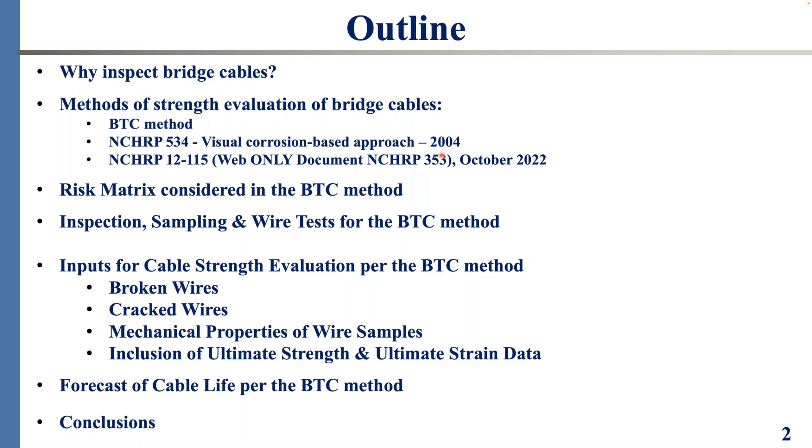And we will finish with the forecast of cable life, a very important feature of the BTC method. The method has been published in two reports of the FHWA. The first is the primer for the inspection and strength evaluation of suspension bridge cables, published in 2012, and a New York State DOT report C0711 published in 2011, co-sponsored by New York State DOT, New York State Bridge Authority, and FHWA.

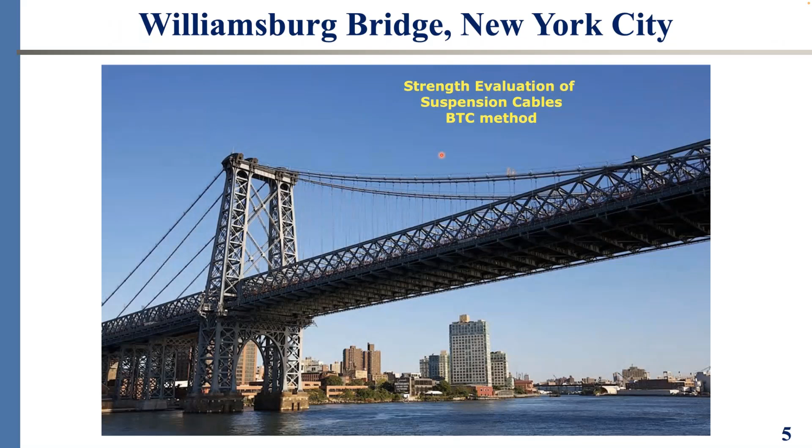The BTC method has been applied on the Williamsburg Bridge cables in New York City, the Pierre Laporte Bridge in Quebec City, Canada, where we applied the method to evaluate the strength and forecast of life of the main suspension cable, as well as the condition assessment of the suspender ropes, the helical ropes, where we forecasted the life of the ropes and worked on the prioritization program for replacement of the entire set of suspender ropes. That's currently ongoing.

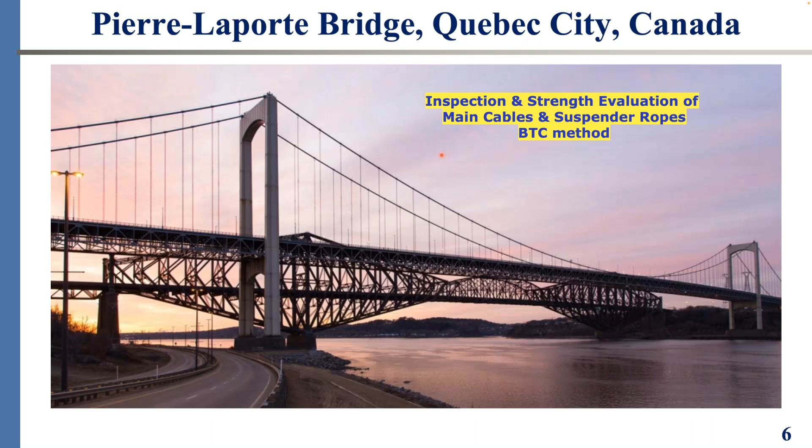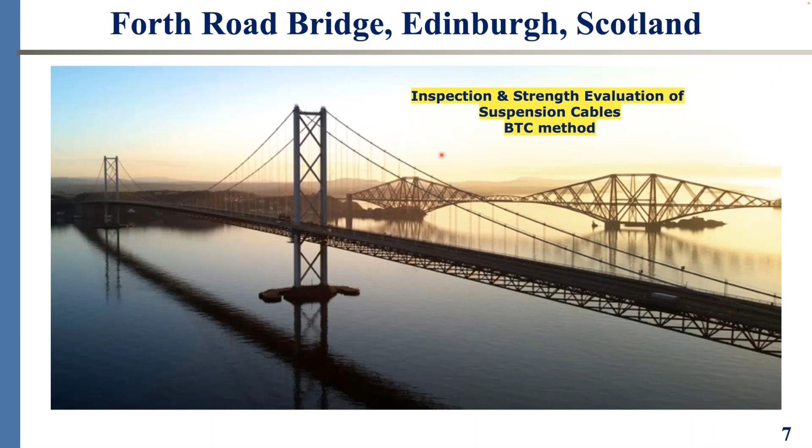The BTC method has been applied on the Forth Road Bridge in Edinburgh, Scotland, and on the Bronx Whitestone Bridge in New York City over the East River, and on the Mid-Hudson Bridge over the Hudson River in Poughkeepsie, about 90 miles north of New York City.

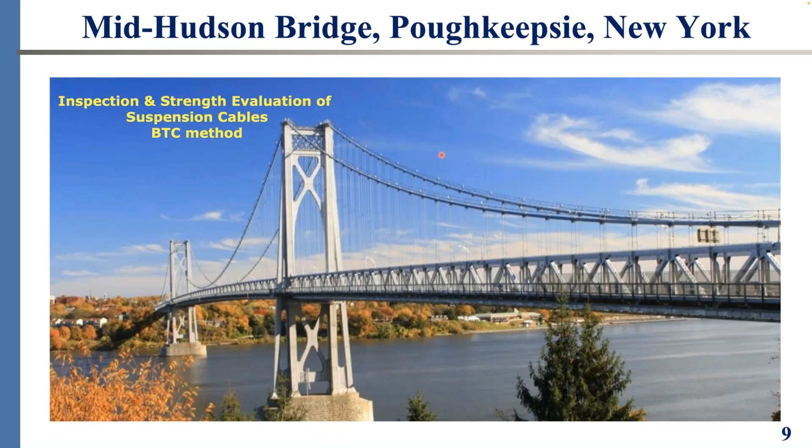Beautiful scenery up there. We have been on the design review and fabrication construction support team for the Yavuz Sultan Selim Bridge, basically the 3rd Bosphorus crossing in Istanbul. It's a suspension cable stay bridge hybrid style of structure. It reminds you of the Brooklyn Bridge, and it is the longest suspension bridge that carries both railway and roadway traffic. The BTC method has contributed to the fabrication specifications, which has a lot to do with the longevity of the design and the life of the cable.

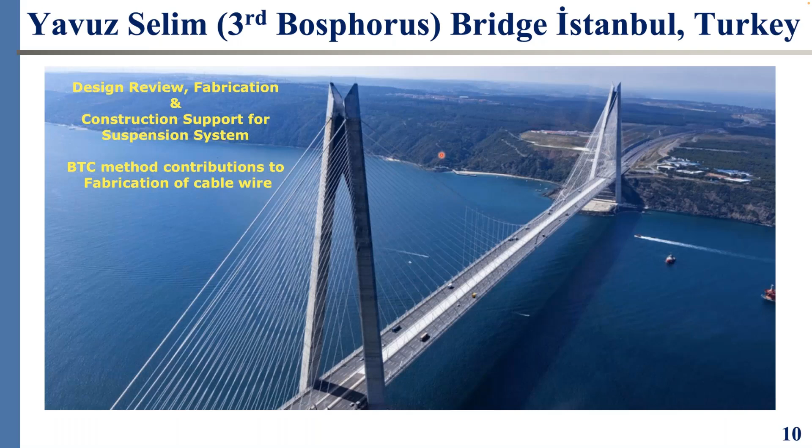We had very much the same role on the 1915 Çanakkale Bridge in Turkey, which also connects Europe and Asia over the Dardanelles Strait. This is now the longest suspension bridge in the world.

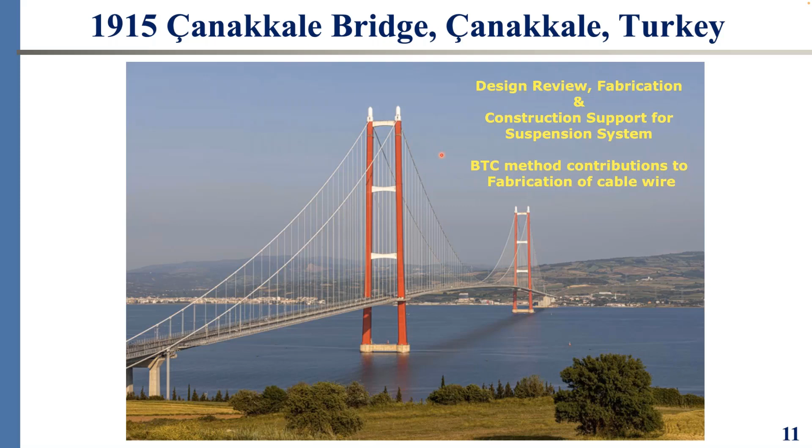Why do we inspect bridge cables? That's a very good question. You look over here, it's an actual replica of a long span cable, and what you have here is upward of 27,000 wires in the cable cross section.

Over time, these wires degrade to different degrees of deterioration in terms of embrittlement, which plainly put is the loss of ductility. They will have cracks, and some wires will break. So a proportion of the cable cross section, in general, will have proportion that's broken, proportion that's cracked, and proportion that's degraded with embrittlement, meaning loss of ductility and loss of strength.

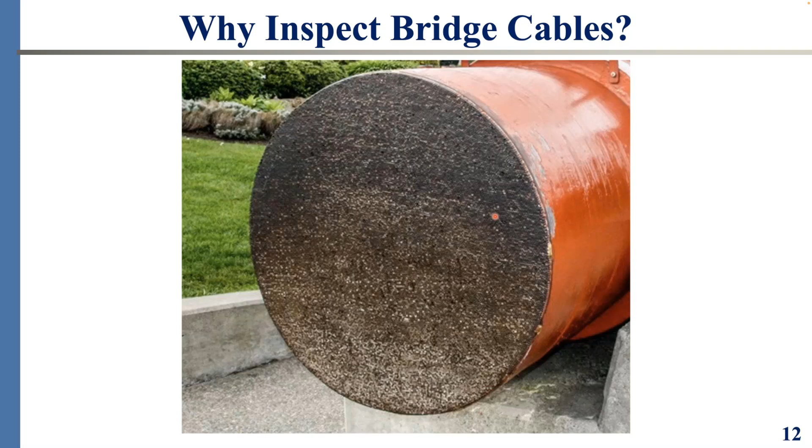By the way, right off the bat, when we mention the word risk, this is just a term we use in reliability analysis and probabilistic analysis - the risk basically of missing deterioration.

So on all the bridges I presented earlier, the existing bridges, aside from the two new suspension bridges I mentioned, they range in age between 53 and 120 years old, and they are in good shape. They are running traffic. The bridges in New York City, I drive on them quite frequently, and the bridges overseas, I drive on them every chance I get, because it's just fun to drive over these bridges.

And the risk that we are trying to quantify here is the risk of degradation, and going forward, what to do about that form of degradation, with the main purpose of prolonging the service life of the cables.

It's very good news that the Williamsburg Bridge is past 120 years old, and a week from tomorrow, speaking of anniversaries, we're going to celebrate the 140th anniversary of the iconic Brooklyn Bridge on May 24th. So there is a lot of good news about that.

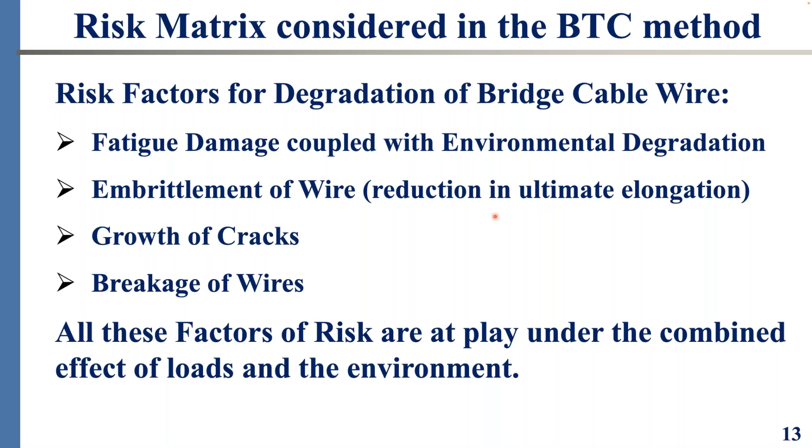So the BTC method process starts with cable wedging and inspection, wire sampling afterwards from each cable opening. By the way, when we say cable opening, that basically defines the length of cable between two successive suspender ropes. So we call it cable opening, panel, or cable length - it all boils down to the distance between two successive suspender ropes.

So we take the wire samples we're going to look at now and take them to the lab, chop them into pieces, have the wire tested as we're going to see later on, and then take the test results and the findings of all the inspections and do the analysis to get the strength of the cable. Then we identify the cable strength today, and do further analysis based on the data to forecast the cable life.

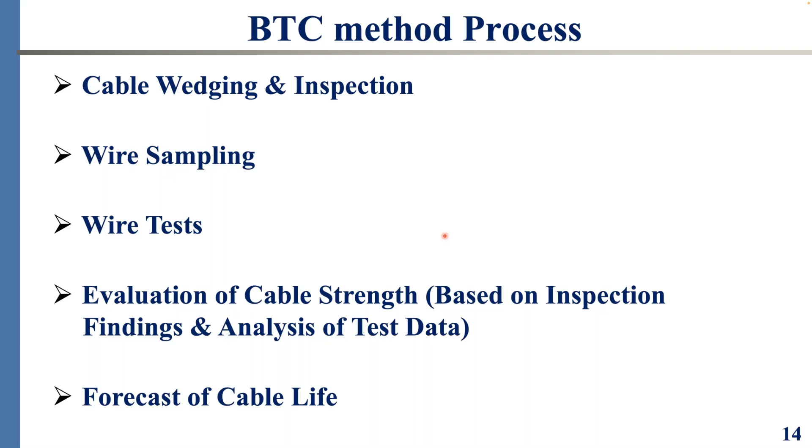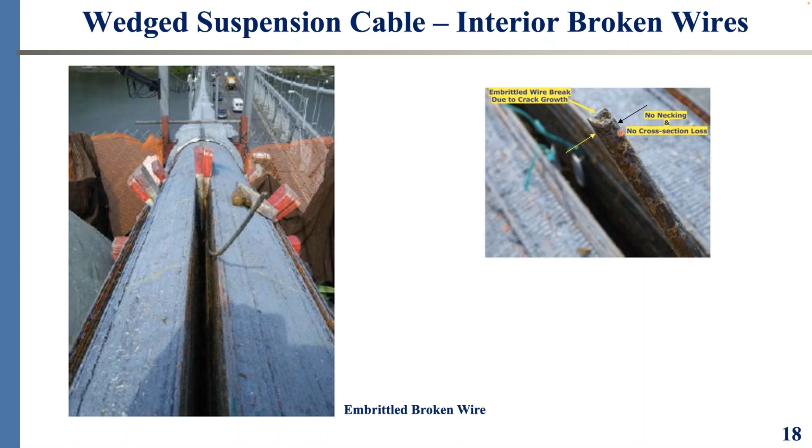It's not a matter of 1 wire or 20, or 15, 16, 18, 20 out of 27,000 or 12,000. It's a matter of leaving a void that hosts moisture and debris and whatnot, and that's not a good thing. So we define a pool of wire samples that we take the samples from, and that depends on the diameter of the cable and how deep we can take a wire out and splice it back in. You'll see what I mean in a couple of slides.

So what we define here is random sampling from each wedge, or whatever random sampling we provide with the BTC method, random sampling process to basically avoid visual bias or the subjectivity of the inspectors.

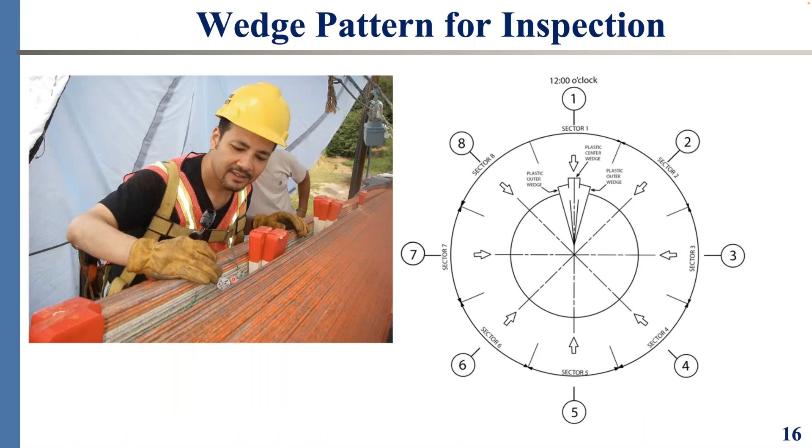Turnbuckle that is used to splice the wire. You'll see a better picture of it—I actually have a sample here on my desk somewhere, I can show it later on. With a couple of pliers on opposite sides, because the turnbuckle is designed that way, you tighten the wire and bring it back to service load, or use a load cell to measure the load in the wire.

So now to the wire test per the BTC method. By the way, all these processes—the BTC method sampling plan has been applied on almost all of them, with the exception of one bridge where we had the test results already. The two methods are done in parallel, so there is no duplication of the sampling, no duplication of the inspection efforts. It is done once and for all, and then the tension test is done.

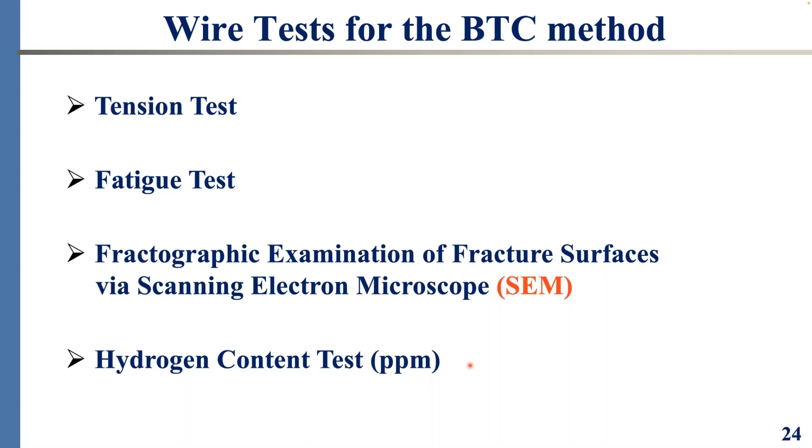And for the ultimate strength, it is typically under 250 KSI. In fact, if you look at the project specifications for all these older bridges up until maybe the mid-70s, you find that the typical minimum accepted ultimate strength was about 220 to 225 KSI, and the strain was accepted even if it was as low as 4%. Up until today, with the wires we're using—the 1960 megapascal wire, which is basically over 280 KSI—we still accept the 4% ultimate elongation. But that's a whole discussion on its own.

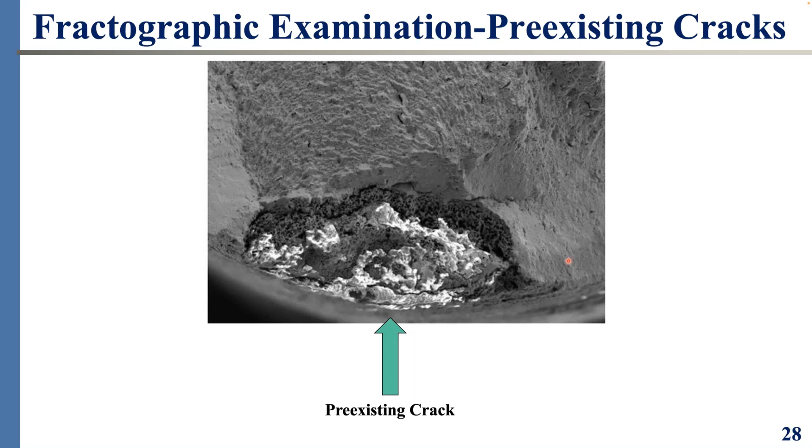So you see here the thumbnail crack. This picture is no mystery - it is the cross section, the circular cross section of the wire. And of course, this is the cracked part. Here is the crescent shape or thumbnail crack, where the wire is maintaining its full cross section, embrittled, with no necking and no sectional loss.

The crack goes into mode 1, which is perpendicular to the stress field, along the longitudinal axis of the wire. Then when it reaches a critical crack depth, it splits along the grain boundaries, and the fracture happens on that upper surface.

So here is another demonstration of these wires. This kind of wealth of information is invaluable in the analysis of cable strength, in forecasting life, and in the assessment of degradation.

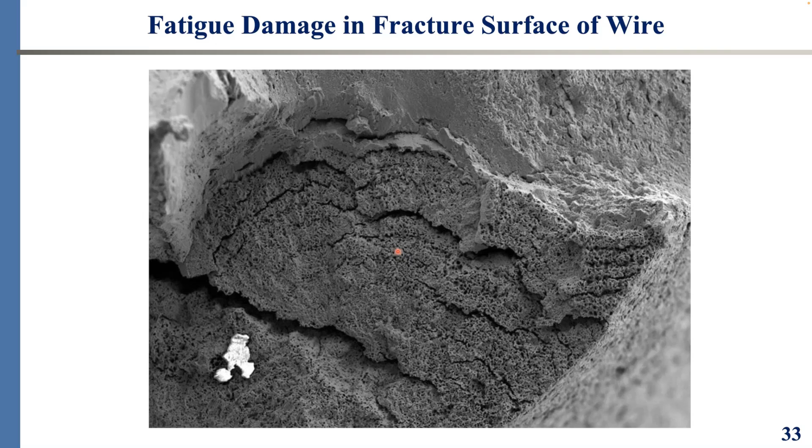So what is the difference between when we say corrosion fatigue, stress corrosion cracking, and visual corrosion? Well, stress corrosion cracking and corrosion fatigue are fracture mechanics terminology - they have scientific meaning. They involve crack growth, the fatigue that happens to the wire under the effect of environmental degradation, which releases atomic hydrogen that comes into the crack tip and crack mouth, keeps breaking the interatomic bond, and furthers the crack growth, resulting in that embrittlement.

It's a different phenomenon. In fact, case in point - when was the last time we had to replace cable bands on a suspension cable because the cable lost mass or lost weight due to loss of material? The answer is never.

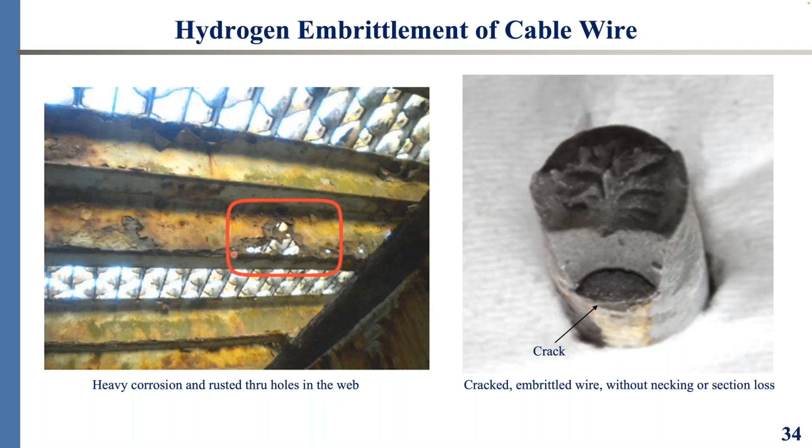ultimate elongation, and with further crack growth, this ultimate elongation will be further lower and lower and lower, up until the wire breaks. And actually, I mentioned the energy under the stress strain curve.

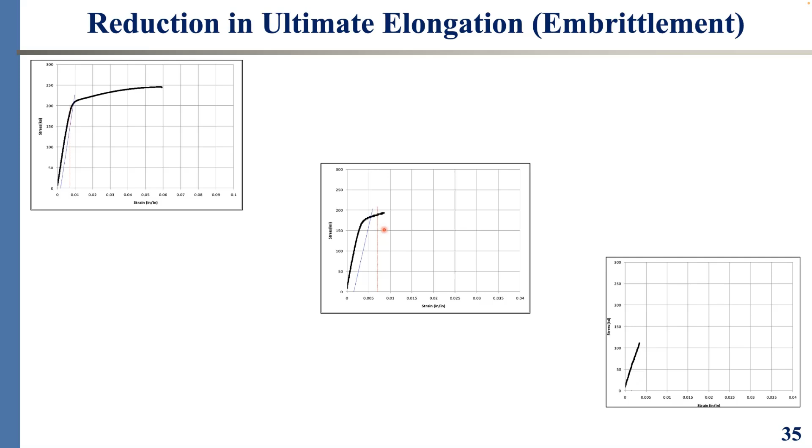If we have time, I'm happy to talk further about our work, though not in as much detail as I would love to, because of confidentiality - a confidentiality agreement we had with some bridge owners not to reveal the work there. So I will leave that at this point in time.

Fracture-based analysis of cracked wires is used in the BTC method. Of course, when we have a cracked component - any structural steel component with a crack - all the elastic analysis we so carefully do with finite element methods and so on is invalid, is insufficient. What takes over are the fracture parameters, and in terms of that, the K sub C, the fracture toughness of the bridge wire, which was an unknown quantity before our work.

We introduced that in our patent and quantified K sub C, which is basically equivalent to the Charpy V-notch of the wire material. That's correlated to sigma cracked, the ultimate strength of the cracked wire, and A sub C, the critical crack depth measured in the specimen at rupture, with Y being a crack geometry factor.

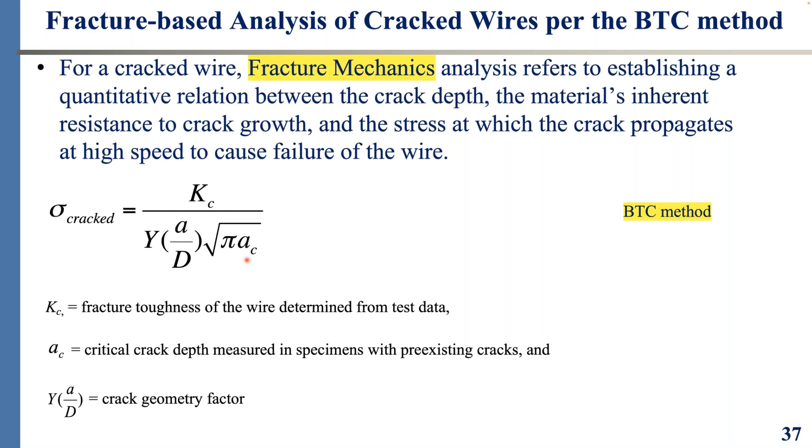The steps involved in the BTC method, in a nutshell: we use the inputs of the entire stress strain curve, given the energy principle I alluded to earlier. We describe every component of the stress strain curve, ultimate strength, with a proper probability distribution, the ultimate strain, Young's modulus, and yield strength.

We provide as an input the probability of broken wires. If you see 5 or 6 wires during inspection, it doesn't mean you have only 5 or 6 wires in the entire cross section. Remember, we see only about 10% of wires in the bridge cable during inspection, so we calculate the probability of cracked wires based on the sample taken and inspected under the microscope to identify the presence or absence of pre-existing cracks.

We use Monte Carlo simulation to develop the stress strain curves for the entire number of wires in the bridge cable, using the probability distributions we talked about, all to develop a failure mechanism of the entire cable, in which the load carrying capacity reaches zero at maximum elongation, and the maximum load calculated is the estimated cable strength. That's the process in a nutshell.

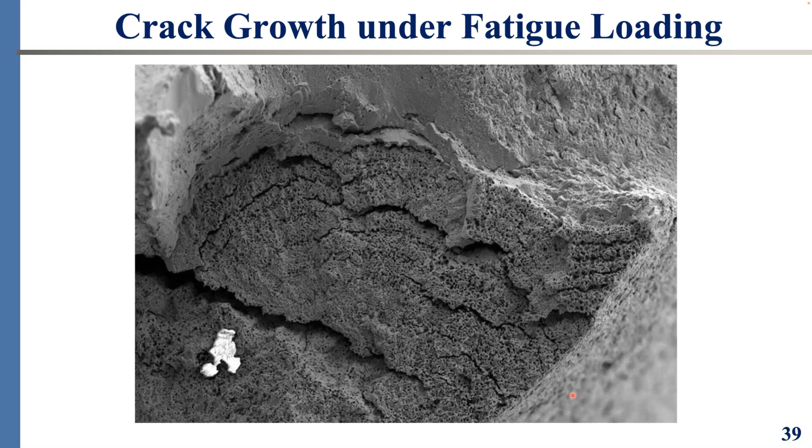I can tell you that the day we took this bridge wire out of the bridge cable, we identified the number of years this depth of crack survived the fatigue loads, and of course we know the parameters. This is done with statistical work, and we have a subroutine to quantify the fatigue crack growth.

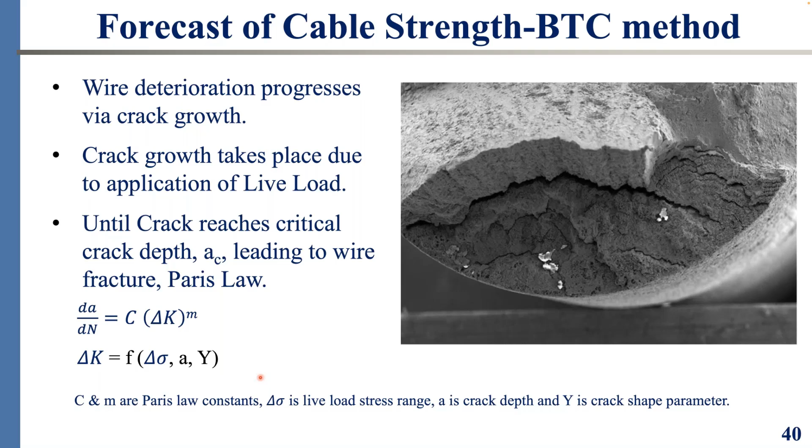We are able to determine the life of that wire to a very high level of accuracy and confidence. Take that as a springboard to forecast the cable life. Now you can appreciate how important cracking is. It's very important, very significant. It has an impactful effect on the cable strength and on the forecast of cable life.

I mentioned NCHRP 12-115. It basically says fractographic examination of wires is no longer required. In other words, we will not know, or you as a bridge owner or engineer tasked with this will not know, where the cracks are, to what extent they grew, and so on.

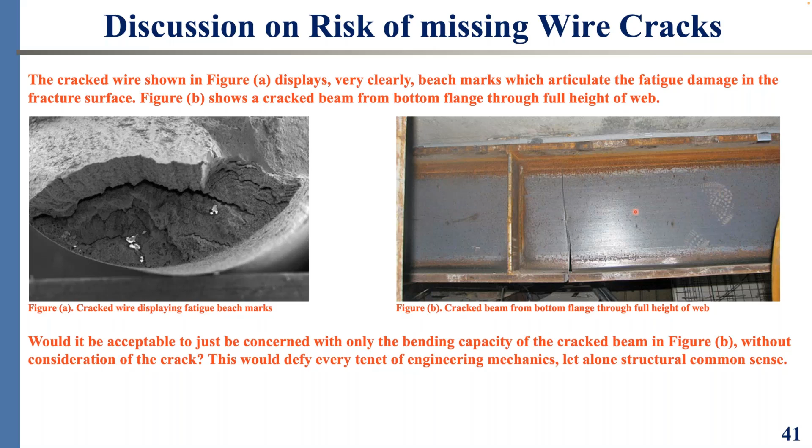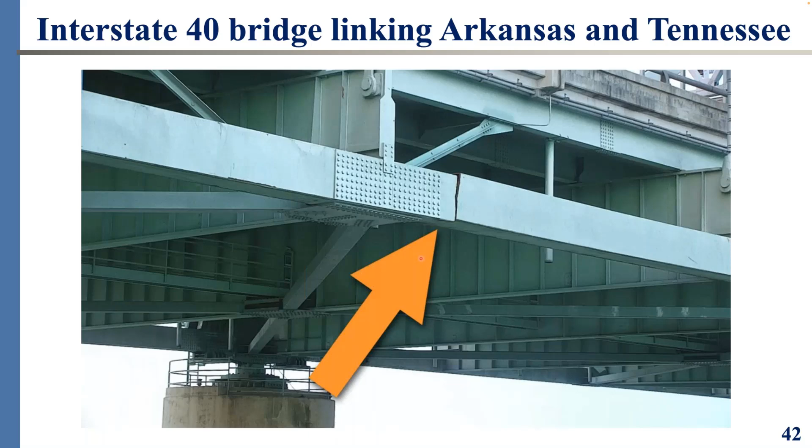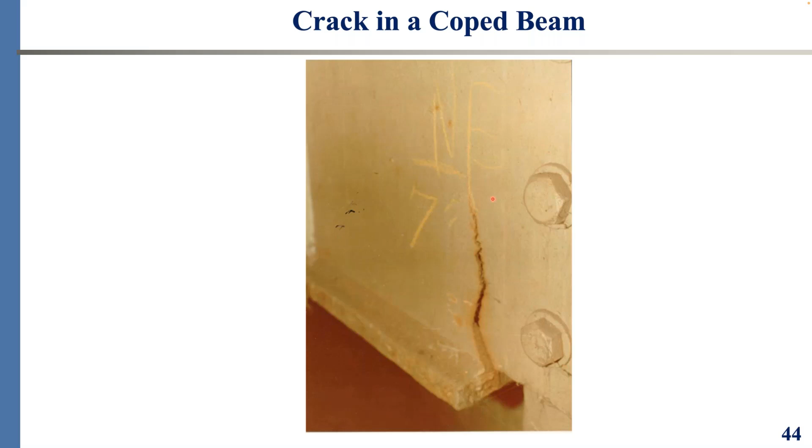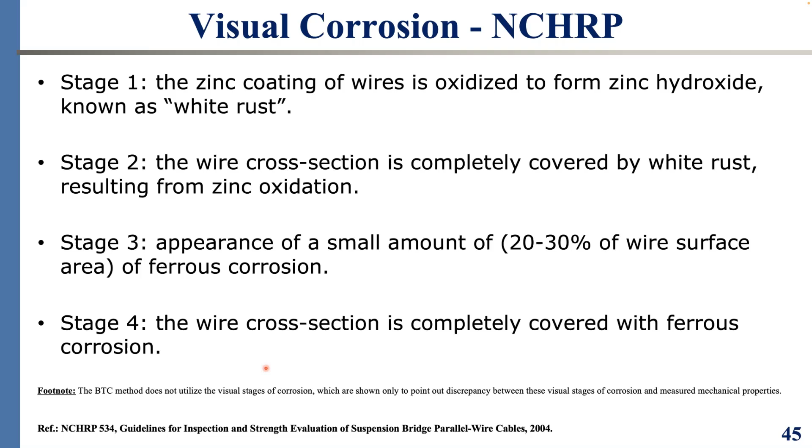That's all visual. It is subjective, and you can see the reference here, this is 534. By the way, we don't use this stages of corrosion, it's just shown here for illustrative purposes.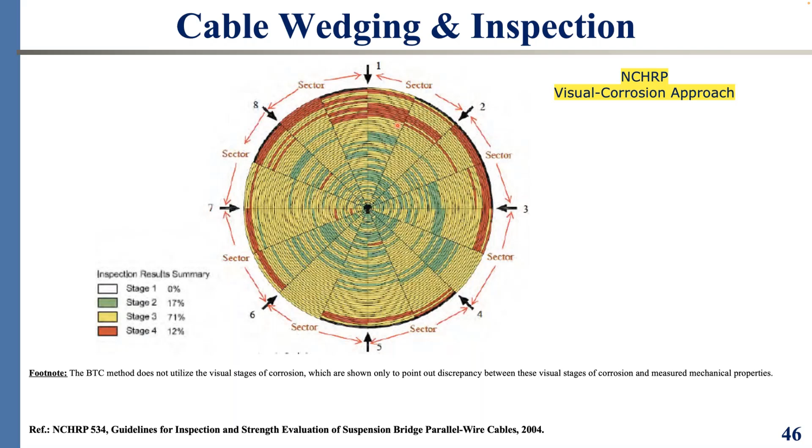So what gives? Well, actually, this visual evaluation of stages of corrosion is juxtaposed here versus the measured mechanical properties. This is referenced in New York State DOT report C-07-11, where the mechanical properties are taken from the testing laboratory, and all these stages of corrosion are defined by the folks that did the NCHRP. For that case study, we did the cable strength by the BTC method, and other folks did the NCHRP methodology, and we are just showing that, juxtaposing that to show the kind of discrepancy.

One would expect stage 4 to be weaker than stage 3 and stage 2. It is flipped upside down. This kind of discrepancy is not happening for just a couple of wires, it's for the entire set of samples. I show here one panel, but in that report I'm referencing, you can see the entire 8 panels where all of them have this kind of discrepancy to one degree or another.

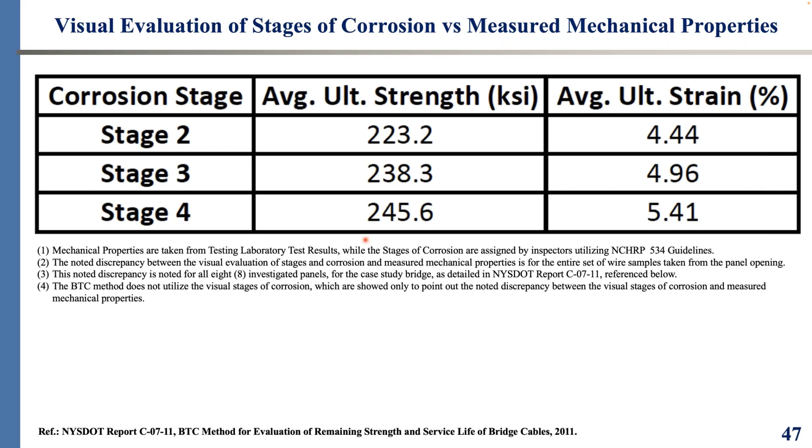So moving along, we see that in just about all the cable investigations we have worked with, there is no correlation between the visual measure of corrosion and the actual measured properties, neither in tensile strength or fatigue life.

I reference here a paper by a group of researchers from Tokyo Denki University in Japan, and they studied the correlation between corrosion and fatigue strength of high-strength galvanized steel wires used for suspension bridge cables. Here is a snippet of the summary of the conclusion. It says that in the specimen obtained from the corrosion levels set in this study, fatigue strength showed results that were equivalent to or higher than those for new wires. The tensile strength also showed similar results.

So there you go. This is the kind of discrepancy that you would see with the visual corrosion.

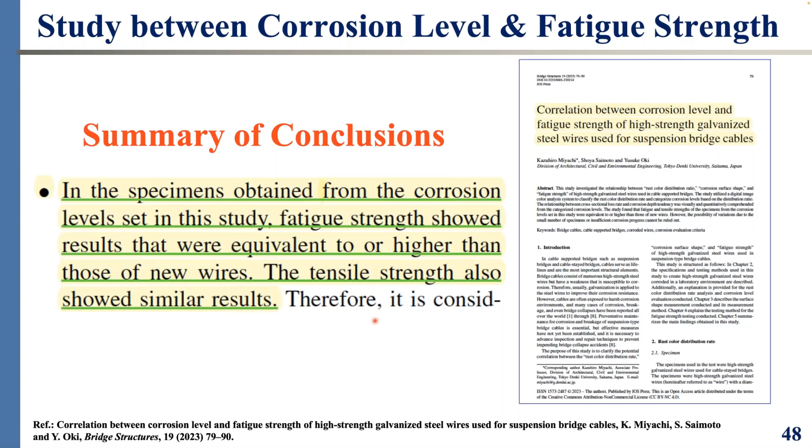So moving along here, what are the lessons learned from the numerous bridges that we have worked with? It's evident that cable-supported bridges are strategic assets with significant value to the economy and society, enabling social and business connectivity. Therefore, the assessment of residual strength and service life is of paramount importance to everybody, all the stakeholders, bridge owners, and the public. Only conducting in-depth inspection, sampling, and testing of wire samples from different lengths of the cable would provide the needed information for strength evaluation and forecast of life of the cable.

A successful strategy for the preservation of bridge cables is a whole discussion, but some traits of a good preservation strategy are to perform periodic inspection, sampling, testing, and strength evaluation, because this will allow the bridge owner to intervene at the proper time with corrective measures to slow down degradation and stay ahead of it. That is really key. With several successive cable investigations along the service life of the bridge, the forecast estimate is honed, and you can get to a more accurate assessment of the forecast.

And any suspension cable investigation, from our experience, must include removal of the cable bands to examine the cable wires under the cable bands. This is one of the areas that are vulnerable to degradation.

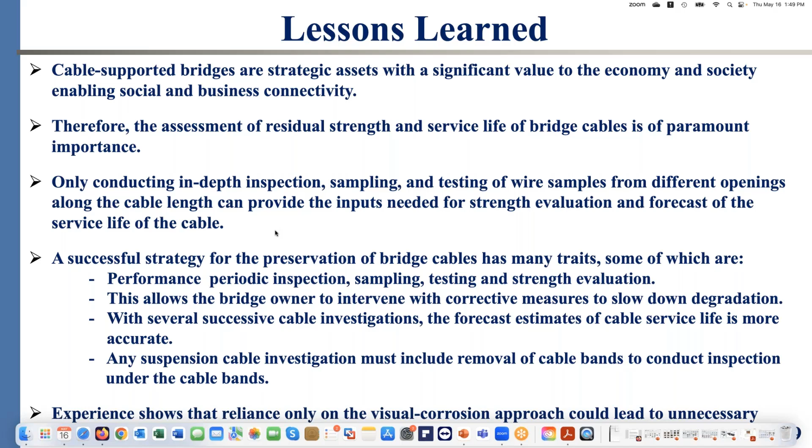Experience shows that reliance only on the visual corrosion-based approach could lead, and has led in the past, to costly and unnecessary measures. The cables are obviously the most critical element of cable-supported bridges. Therefore, it's logical to use a condition assessment method that provides confidence, that actually looks at measurable metrics of degradation without conjectured observations that would introduce inaccuracies in the analysis.

With our vast expertise and successful application of the BTC method on numerous bridges, the method presents a reliable alternative methodology, and it provides an independent checking mechanism rather than just relying on the NCHRP visual corrosion-based approach alone. This will provide the bridge owner with greater assurances when dealing with decisions regarding the results of internal inspections and strength evaluation. The BTC method's unique forecast of life capability provides an unparalleled feature that serves the bridge owner and helps with the preservation and prolonging of the service life.

One very important element I want to mention here: with some of the new bridges I mentioned, we were literally in the room where we helped influence some of the project specifications, and we contend that this will take us a longer way in delaying the wire degradation and prolonging the cable life. That's a very important element of the whole process. So if you have a new bridge, we can definitely assist in terms of that aspect.

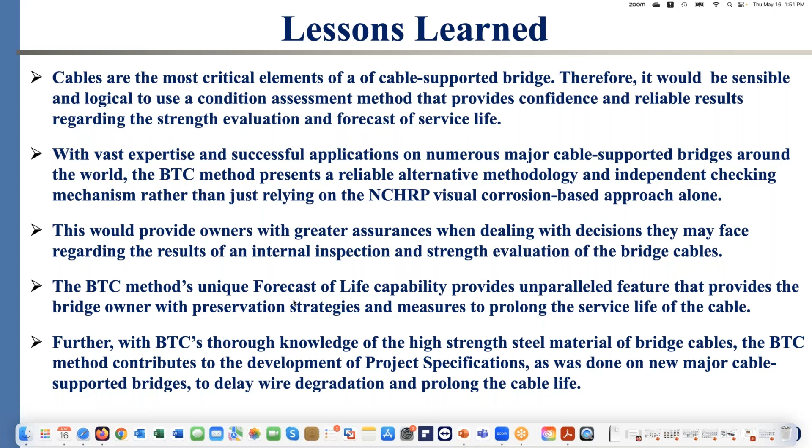In conclusion, the BTC method has been applied to evaluate and forecast the service life of the bridges I mentioned at the onset: Bronx Whitestone, Williamsburg, Mid-Hudson, Pierre Laporte in Canada, Forth Road in Scotland, and others that we cannot talk about here today. On the Pierre Laporte, we did the main cable, the prioritization of the replacement, the condition assessment, and the forecast of life for the entire set of suspender ropes.

One very important element I'd like to leave you with is that cracking is, if not the only driver, certainly the major driver of cable strength degradation. The application of the principles of fracture mechanics is essential, and by that definition, fractographic examination is a crucial step to identify pre-existing cracks.

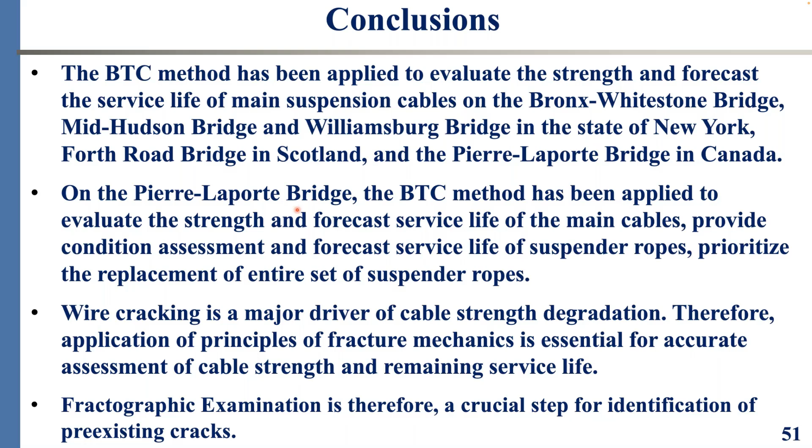The BTC method, we can say today, is the only method that provides identification of pre-existing cracks via fractographic examination. It does fracture-based analysis based on fracture mechanics, and it forecasts cable life. It applies to parallel and helical wire strand cables, and provides condition assessment for suspension cables, stay cables, bridge cables, and pre-stressing steel strands of pre-stressed girders, including the forecast of service life.

Finally, the BTC method presents an overall risk management strategy to estimate cable strength at a high level of confidence.

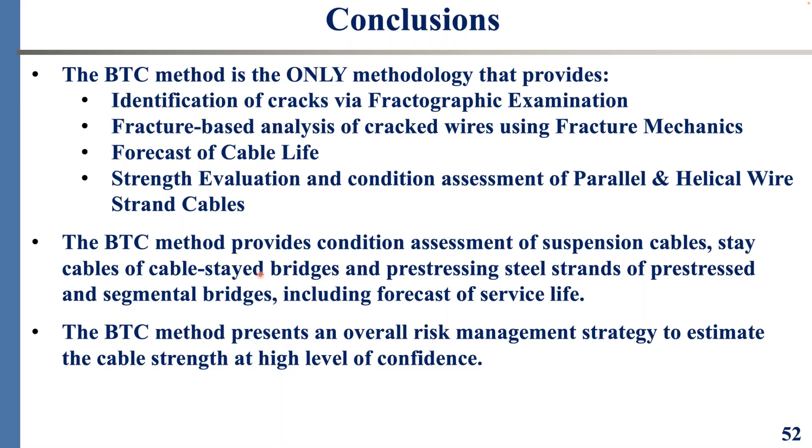Here is the final slide that has my contact info and our website. Please let me know if you have any questions. I thank you very much for listening.

Thank you for the opportunity, Atarod. I turn it back over to you. I'd like to thank Khaled very much. I really appreciate the information. It was a fantastic presentation.

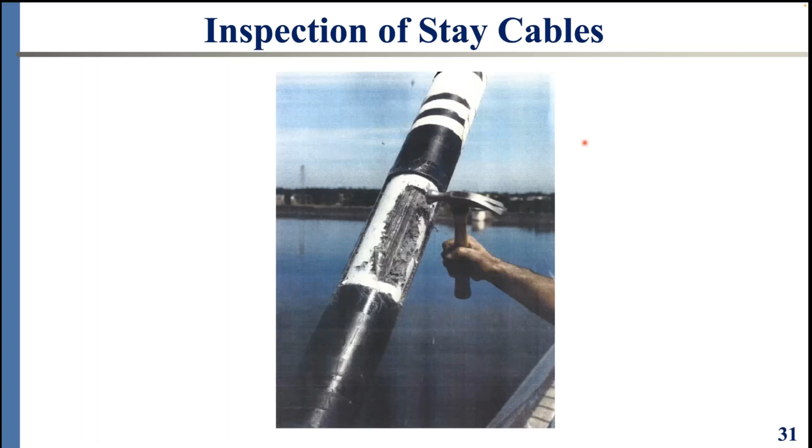One thing I must articulate here, this is just for schematic purposes. You see the anchorage—I mentioned the anchorage because, relatively speaking, you would find more problems towards the anchorage because of the bending fatigue component. There are ways of going there carefully, trying to reach this level of the wires, and you might find a lot of wax and grease inside the anchorage in these locations. It depends on the particular stay cable construction, and you can get a lot of information from that.

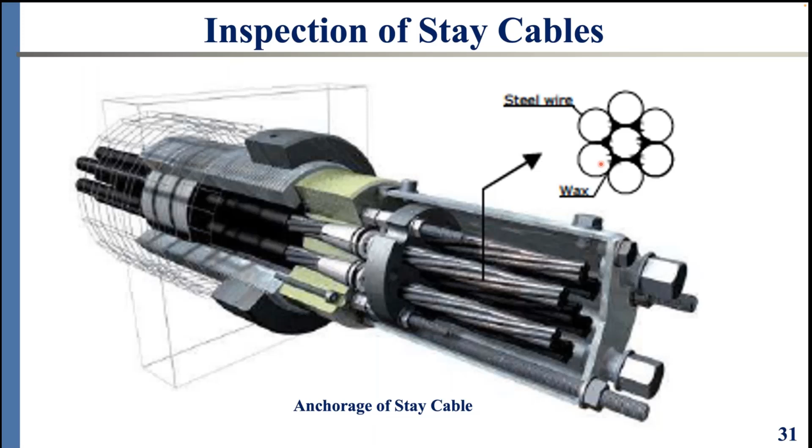Here's a cost question that came in beforehand. Federal funding is sometimes tied to service life. Can the BTC method be used during design and budgeting to project service life in the interest of securing matching federal funds? Absolutely. This is a great point.

This is what I mentioned in the lessons learned, where we contributed to the project specifications. There are certain elements, more than just one, that dictate the longevity of the bridge wire. Using our BTC method and our know-how on the bridge wire material, we specified certain aspects to prolong the cable life. That is definitely doable. It's been done, and we're happy to assist in that regard.

Could you comment on time and cost to use the BTC method? The cost is very comparable to other methods. There's a nominal cost in doing the fatigue test and the fractographic examination, because we do a big part of the fractographic examination with our fracture mechanics expertise. So the cost is comparable, and the time as well. This is our line of work, and in terms of time, we turn things around in short order.

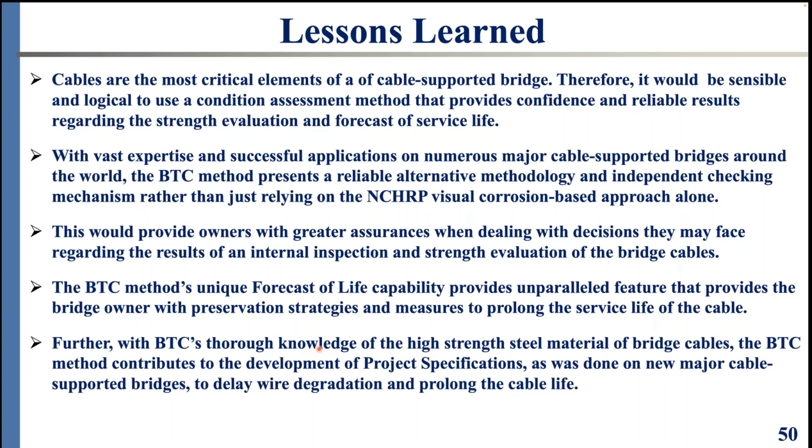How does the BTC method accommodate helical strand suspension bridges, or any helical strand bridges? I want to bring up a case which is public knowledge, not revealing a secret. This is the Waldo Hancock Bridge cables before they were dismantled, when the bridge was demolished. You see all these broken wires, all basically embrittled.

If you zoom in on the specific wires, all these broken wires everywhere were embrittled - you see this embrittlement across the full diameter of the wire. So we can take this, apply the testing, apply the BTC method, take all these fracture surfaces and do the fractographic examination, identify the cracks, and do the examination. That could be done for any other cable-stayed bridge.

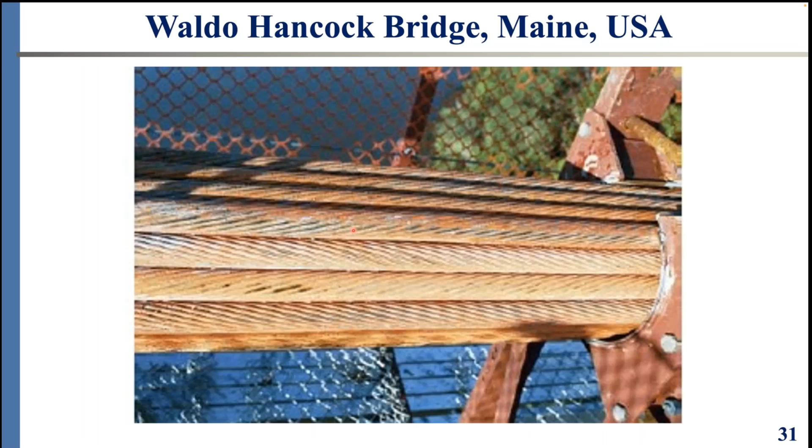Is the BTC method destructive or non-destructive testing? Actually, I want to mention one quick thing for the Waldo Hancock case - from the records, the presence of micro cracks was dominant, which emphasizes that embrittlement aspect. Let me go back to the slides on sampling to answer that question.

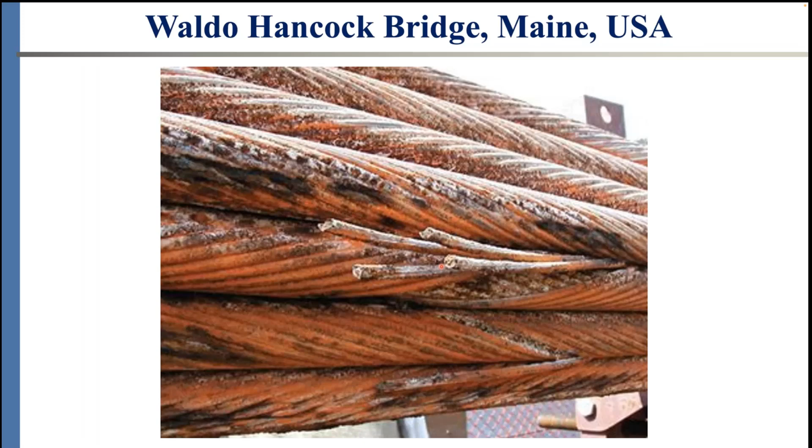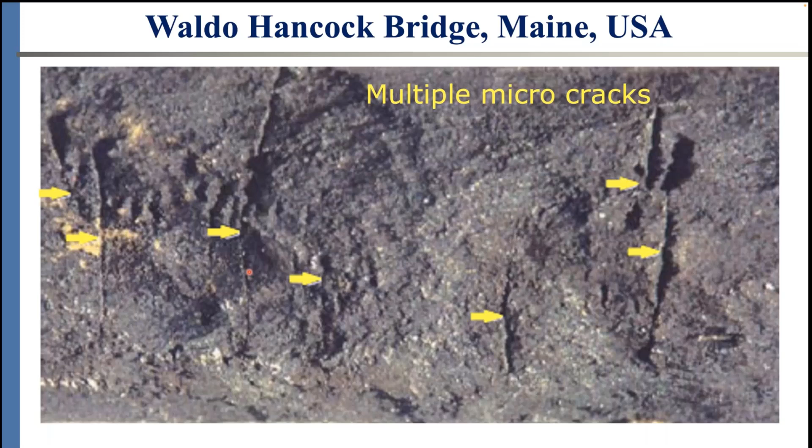This is the very reason not to be destructive - we identify this pool of wire samples. Any wire we sample, we put back in with this very good methodology of installing a brand new wire with that turnbuckle. The sample is taken out, you put a new wire back in serving the same service load, and off you go. There is nothing destructive about that for the cable itself.

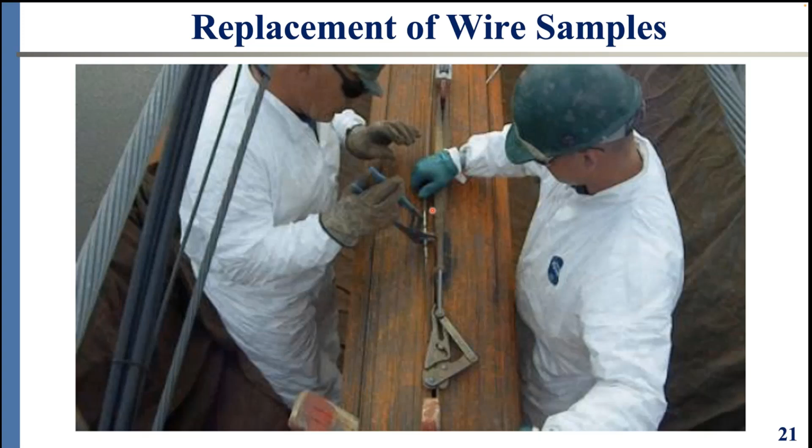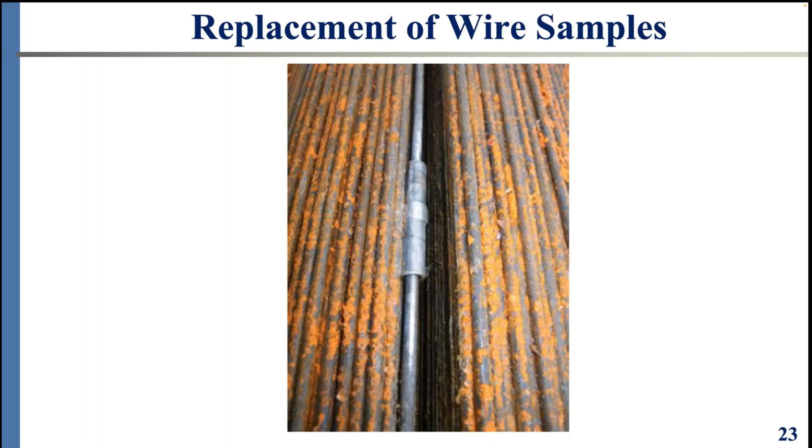Here's another question that came in beforehand. Does galvanizing or the zinc coating have an adverse effect on the BTC method results? Not at all. Maybe I should understand the question as asking what is the effect of zinc coating on the wire itself - we find the effect of zinc coating on the behavior of the wire.

Case in point, the proof is in the pudding. When we see that the wire has this kind of ductility or crack growth, that is all in the test data. That is the blood work that will show everything: the effect of zinc coating, the effect of embrittlement, the effect of growing cracks.

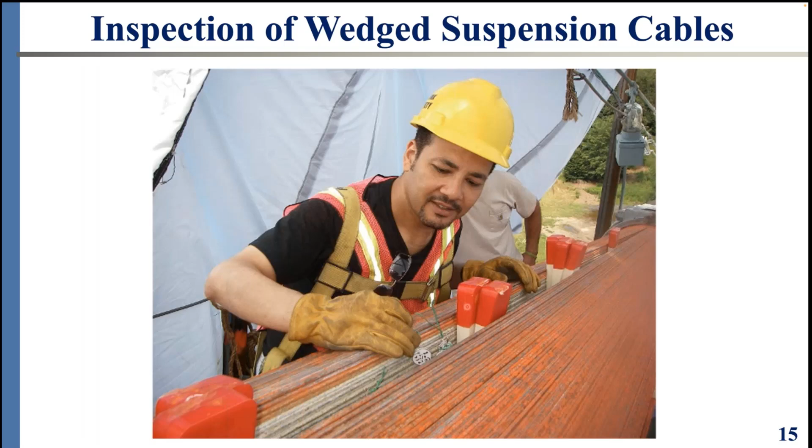Okay, here's some new questions that came in. Is it possible that some of the cracks in the scan of the wire were created while taking the sample? Oh, no. You can identify that immediately.

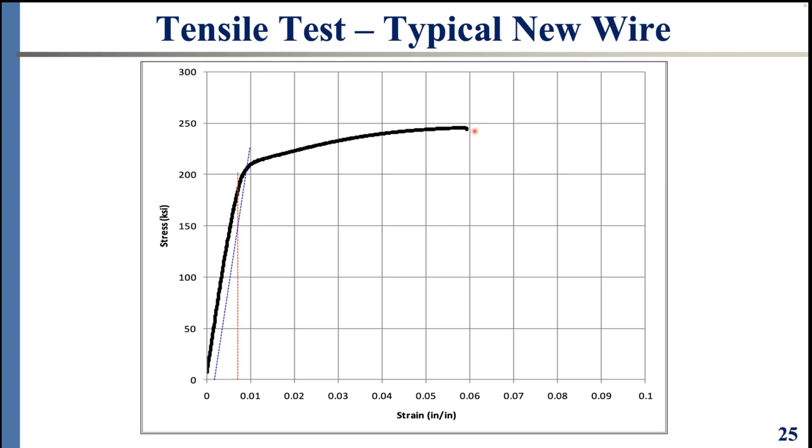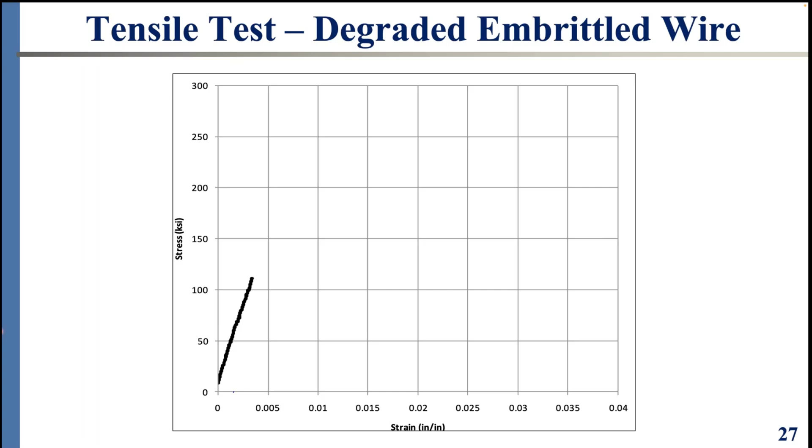These wires develop beach marks over years and years, and they have certain features. If someone is talking about nicking the wire - first of all, we don't do that, we're very careful in doing the sampling, and that does not typically happen. If by error there were such an occurrence, which I've never seen, it basically wouldn't be quantified as cracks. A person looking at this, knowing what they are looking at, would distinguish a crack from a nicked wire by a tool or whatnot.

Does the wedge opening cause any damage long term to the cable? No, not at all. These wires are very sturdy, and the kind of wedges we use—some people still use wooden wedges, but these are fiberglass. Compare the hardness of this versus the wire, it's not even close. They don't cause any damage.

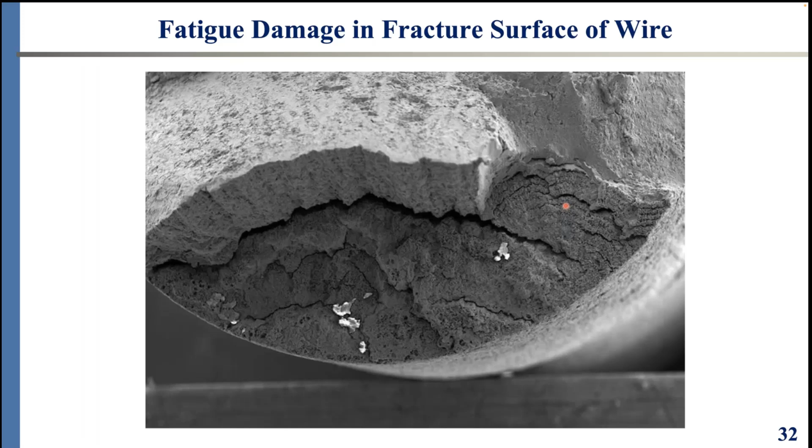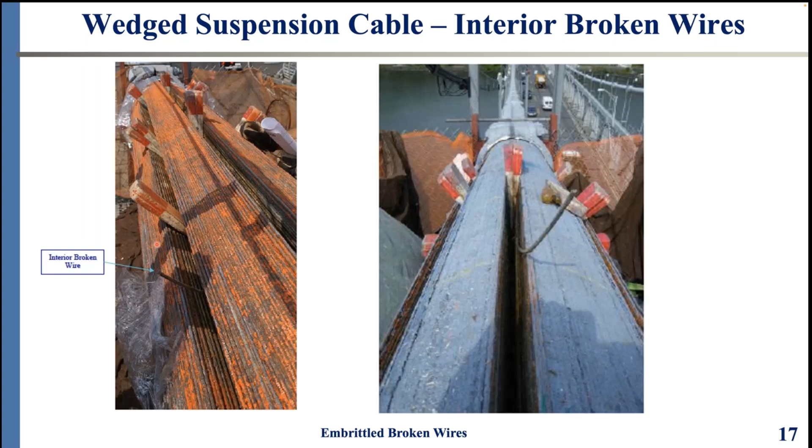Yeah, okay. Now here's another question: what are the differences between wires used in old cable bridges and new cable bridges? You mentioned the difference in strength—is there anything else?

Yes, well, in a sense we have the strength now. I can tell you for the new suspension bridges, the latest ones we worked on, the ultimate strength is 1960 megapascal, which is a little over 280 KSI. That's the minimum accepted. Compare that with 220 or 225 KSI—so we are pushing the envelope.

But there's a big—let me take that back, I don't want to say the word concern—there is a caveat to what we say here, because nothing comes for free, Paul. We get that awesome strength at the expense of reduced ductility. You see what I mean?

So we push the envelope on strength, but that actually induces vulnerability on the ductility axis of the curve. When we increase the carbon content and the elongation of the grains is pushed further, you are increasing the distance between the grains, which again reduces ductility. The other toll to pay is allowing atomic hydrogen to penetrate, break the interatomic bond, and cause embrittlement. So this is part of what we need to be careful with going further, because we're getting very ambitious in terms of span lengths.

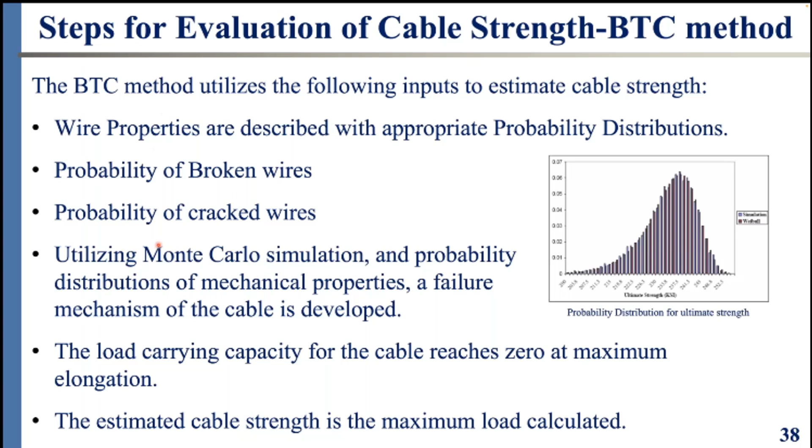Great. There's a question that came in which is not bridge related. It says, can this method be used for checking cables for ski gondola cables? For what, sorry? This is the gondola, like the cables for skiing. Yes, for skiing.

It's applicable. Yeah, it's applicable to any cable made of high strength steel material. It has a different set of loading, applied loads, but at the end of the day, the assessment of degradation and longevity, certainly it could be applied to that.

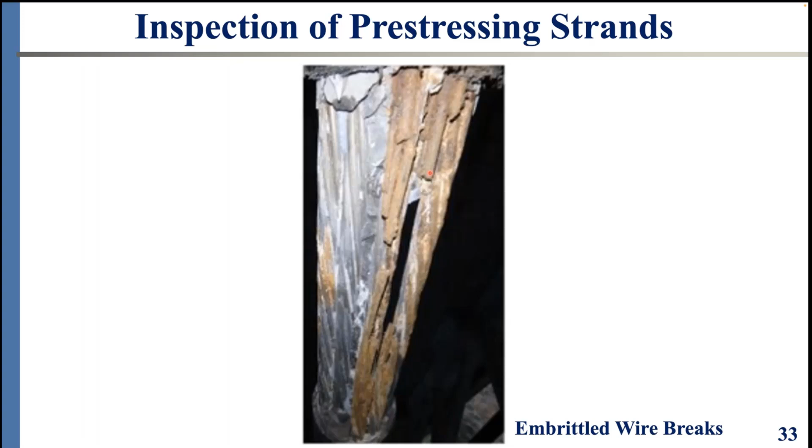Great, I have a question of my own. If we go to sampling, to sample the wires, how can you sample the one in the middle? Not at the top, but the one in the middle. Right here? Yeah, around the middle. How can you sample, or here, for instance? Around the middle, yes, like here, Jamal, you're talking about the middle somewhere here?

Yes. Yeah, we don't do that. We don't recommend doing that, even if we're able to go there and cut the wire. The problem is, when you go back and try to use pliers and rudimentary tools, we cannot put the wire back in, and that will make it destructive and create a void. We try to avoid that at all costs. The return on that is not worth it.

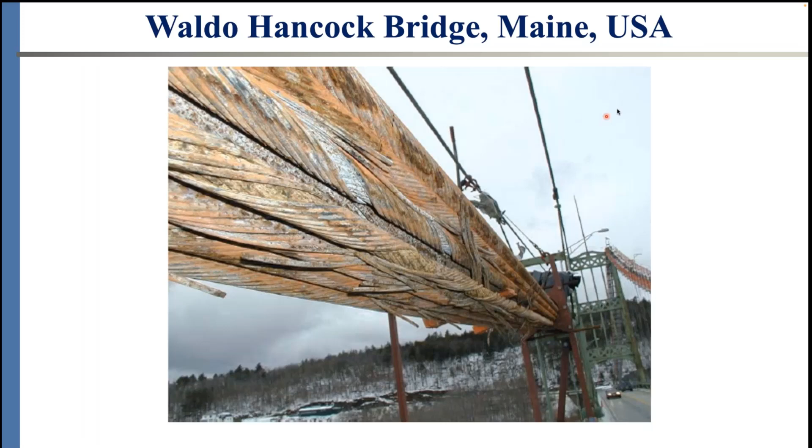So the sampling would not be applicable to every location on the cable, just the one at the top you're talking about? Well, actually, that is true for every method. It's not only a stipulation of the BTC method.

We don't recommend it, even though there was a particular cable, without mentioning names, where samples were taken much deeper, and I'll leave that as is. But this was after the fact. We looked at a case of that magnitude, and the good news is, for most cables - not all, there are some exceptions - the tight compaction close to the center would render these wires stronger. So it's statistically safe to take wires from the outer ring, where you can put the wires back in.